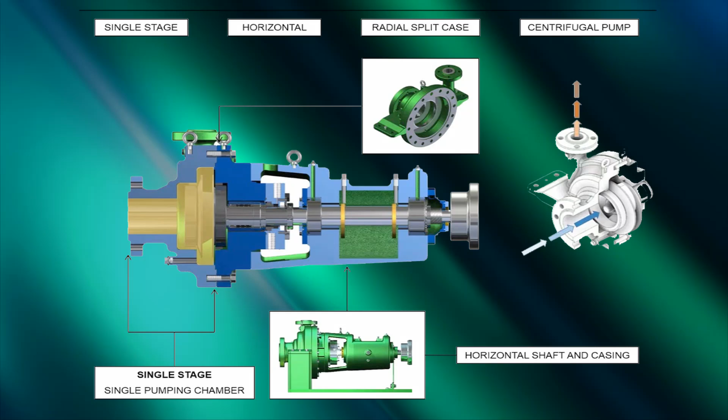This video will guide you through the disassembly, inspection and reassembly of a single stage, horizontal, radial split case centrifugal pump. The pump procedures are described in a series of videos, each including a step-by-step guide focused on a workshop performance activity.

The pump is made up from the following parts: a single stage, horizontal, radial split case centrifugal pump.

During the pump overhaul procedure, you will use a selection of tools to safely perform each task. Each section of the video will begin by describing the tools and their parts, and the video sequence will further explain the correct use of the tools.

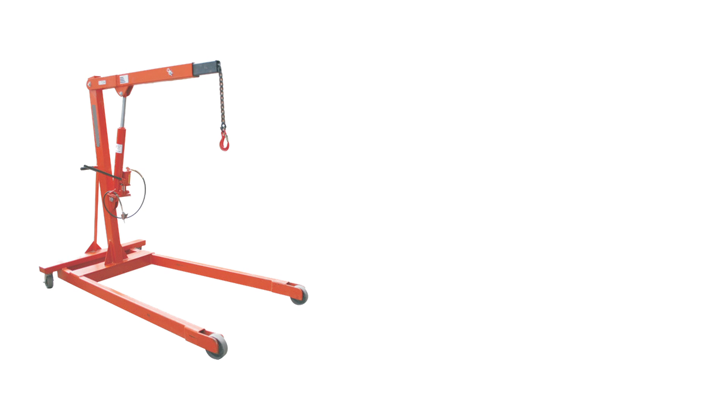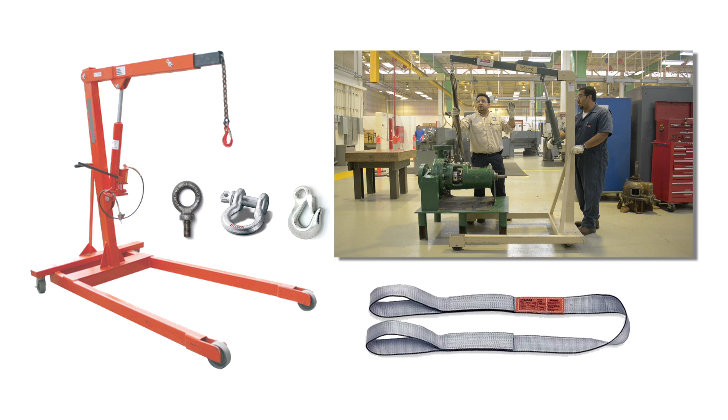At any time during the video, you can click on a toolbox icon to see the tools used for a specific task. You'll need to perform a series of lifting operations during the overhaul procedure using an approved mobile floor jib crane, web strops, eye bolts, shackles and hooks to perform the lifting and rigging tasks. Be aware that the pump is heavy and needs to be handled with care.

The disassembly procedure starts with the removal of the drive coupling. You will use bearing pullers to perform the task. The pullers are made up from the bridge beam, spindle, rods and beam bolts.

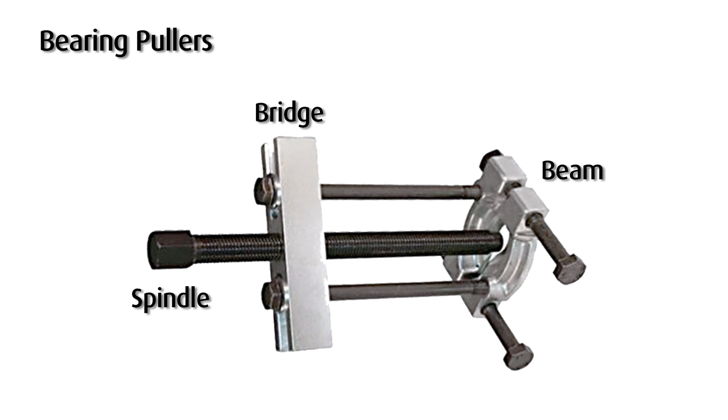This is the correct position for placing the bearing pullers on the drive shaft.

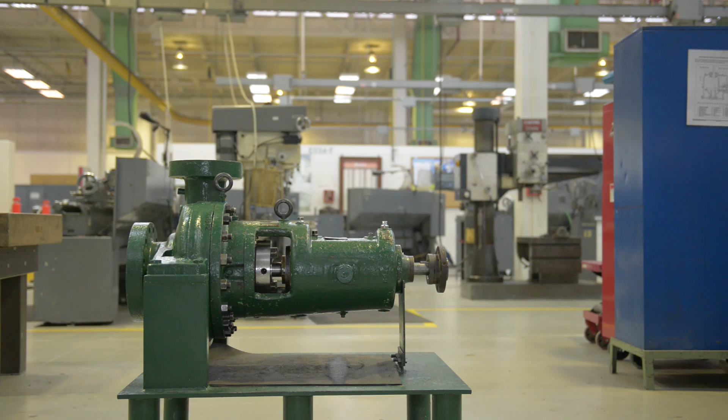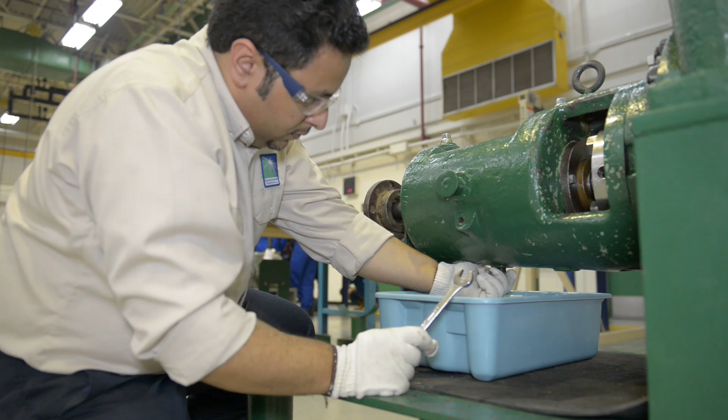Place an oil drip tray underneath the bearing bracket and remove the drain plug. Allow the oil to drain into the tray and dispose of the oil safely.

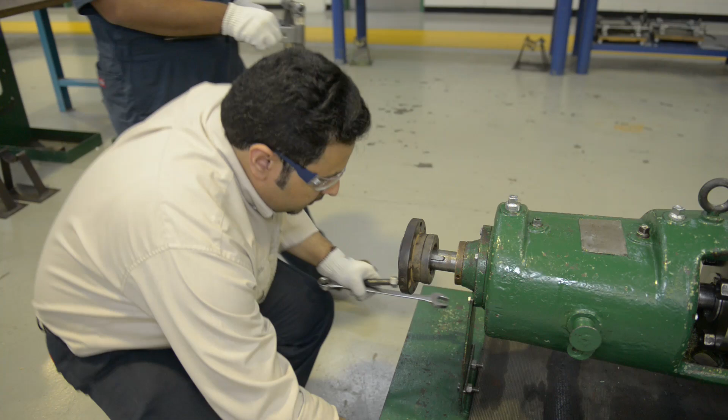Loosen the Allen screw holding the inner hub onto the drive shaft.

Position the bearing pullers so that the beam halves are positioned behind the inner gear hub. Tighten the beam bolts.

Use a ratchet or ring spanner to continue to tighten the spindle until the inner hub gear begins to slide and is completely removed from the shaft.

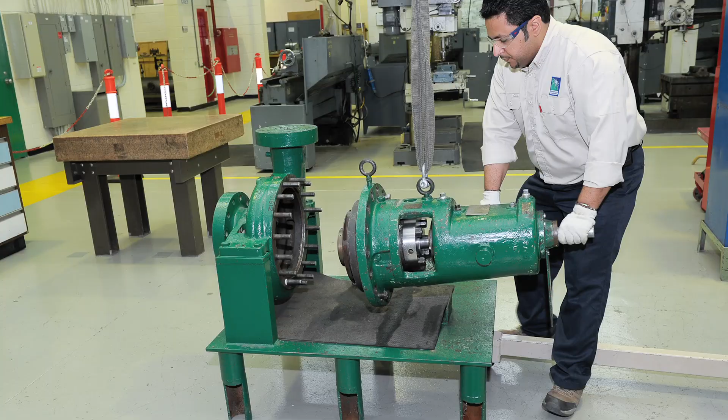The outer sleeve gear is now free to slide from the shaft. Use a brass punch to tap the coupling key free of the shaft.

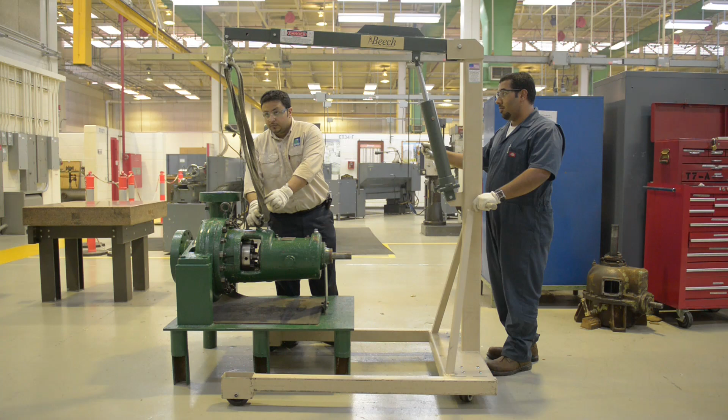The second part of the disassembly process is to remove the seal housing and bearing bracket from the volute casing. You will use a jib crane, hooks, shackles and web slings to safely remove these parts. This is the correct way to safely rig the pump for lifting using the correct equipment.

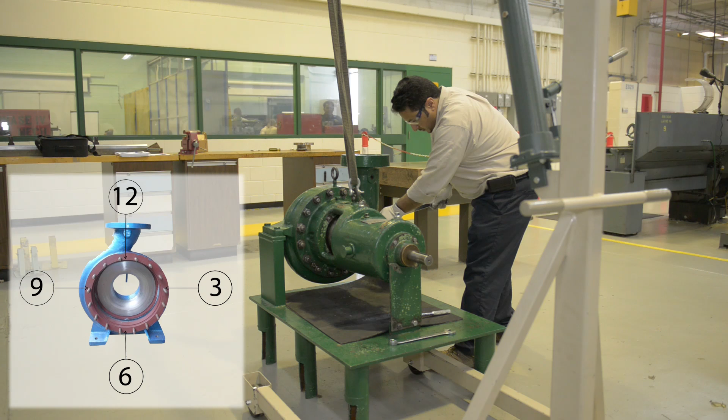Coordinate with a partner to position the mobile jib crane in a central position over the pump. Select the center of gravity, or COG, of the load. Rig the load with the hook and shackles and attach the web sling. Operate the hydraulic jib until the web sling is tensioned.

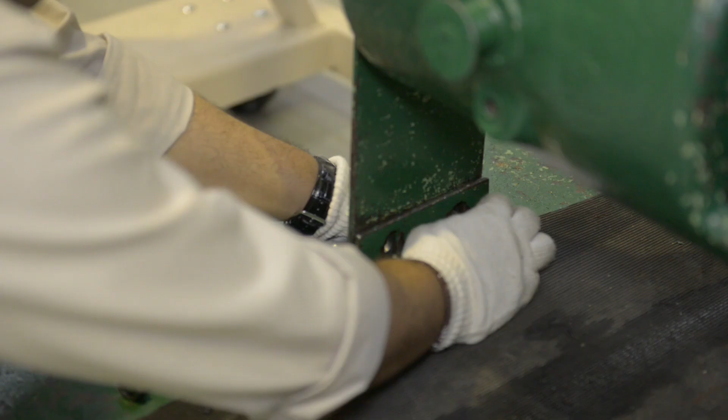The correct selection of tools to remove the pump from the volute casing is very important. Spanners must fit exactly over the head of the nut or bolt to avoid injury. In this section of the dismantling procedure, you will use a ring spanner, a combination spanner, a socket set and a drive ratchet.

You may need to separate the seal housing from the volute casing flange by forcing a wedge between the joint. It's a very important safety issue that you use a spark-resistant wedge and hammer to perform this operation.

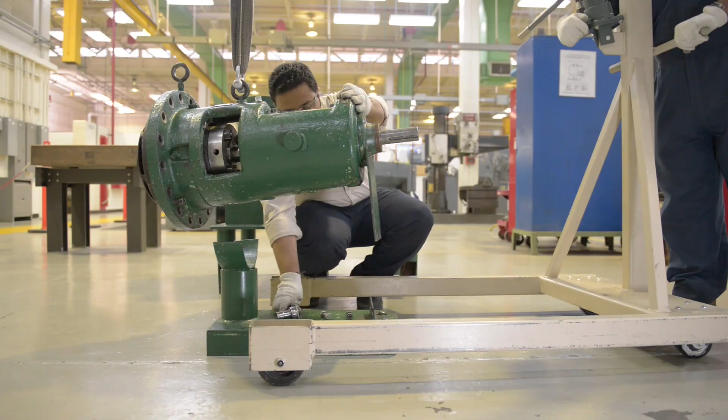Start by loosening each nut opposite each other on the seal housing flange. Loosen the nut in the 9 o'clock position first, then move around the pump to loosen the nut at the 3 o'clock position. This procedure ensures the pressure on the flange is released evenly.

Loosen the nut at the 12 o'clock position and then at the 6 o'clock position. Continue in this pattern until all the nuts are loosened.

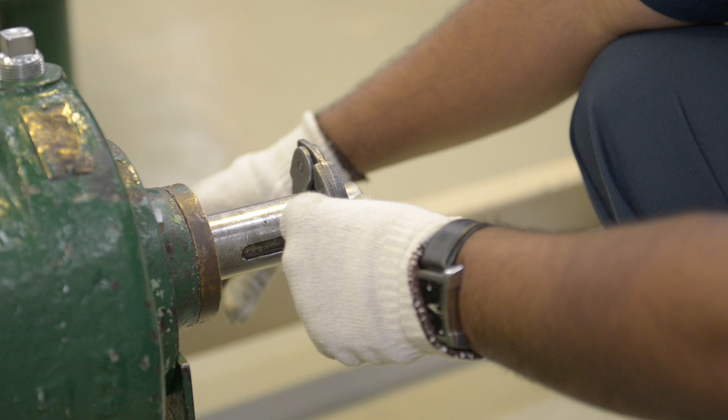Once all of the nuts on the seal housing flange are off, use the correct size socket, drive ratchet and combination spanner to loosen the nuts holding the bearing bracket support frame to the pump plinth. Withdraw the bolts and place them in a tray for storage.

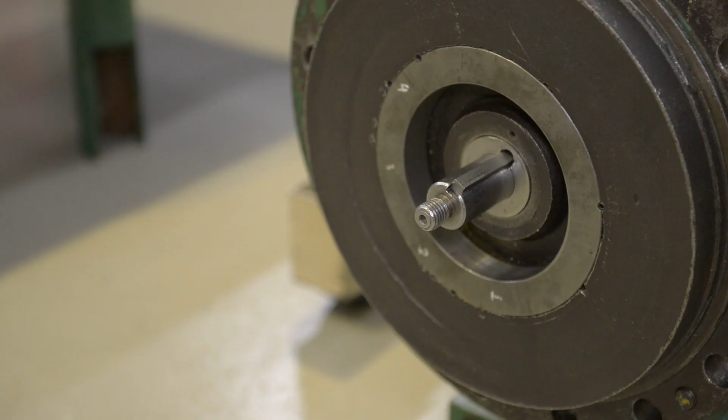The seal housing flange is a very tight fit onto the volute casing, and you'll need to jack away from the casing in order to remove it. 2 bolts are placed to push the seal housing away from its connection with the volute casing flange. The jacking bolts are positioned opposite each other, so an even pressure can be applied to ensure the seal flange does not jam in position.

Use the correct size ring spanner to tighten the jacking bolts. Work on opposite bolts a little at a time to slowly ease the flanges apart. Continue to jack the flanges apart until the pump is completely removed from the volute casing.

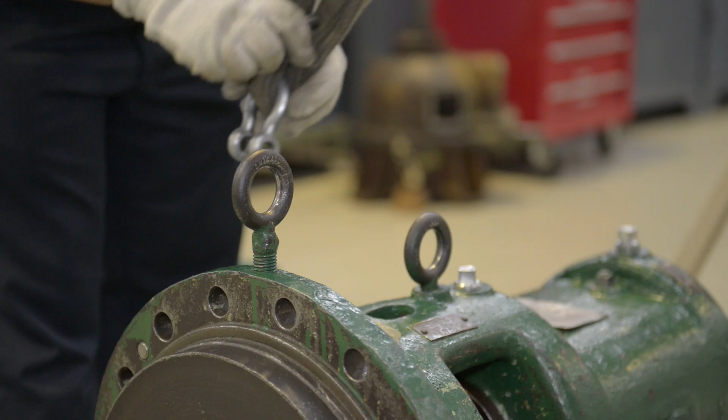The pump is safely supported by the mobile jib crane and can be withdrawn to a safe position.

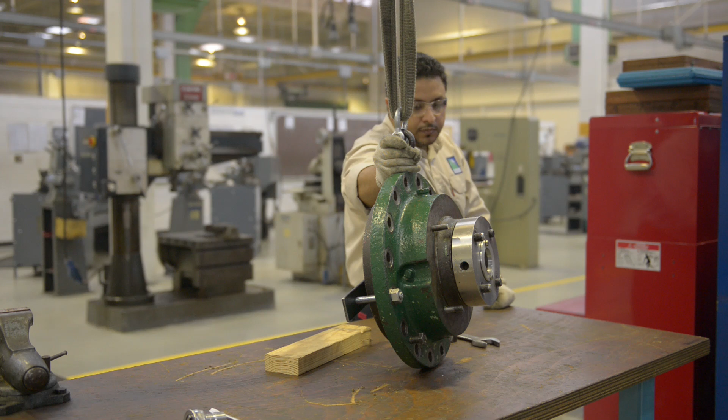Move the pump support jig to a safe position on the workshop floor with 360-degree access. Slowly lower the pump into position and place the bolts in the support. Use a drive ratchet, socket and combination spanner to tighten the bolts.

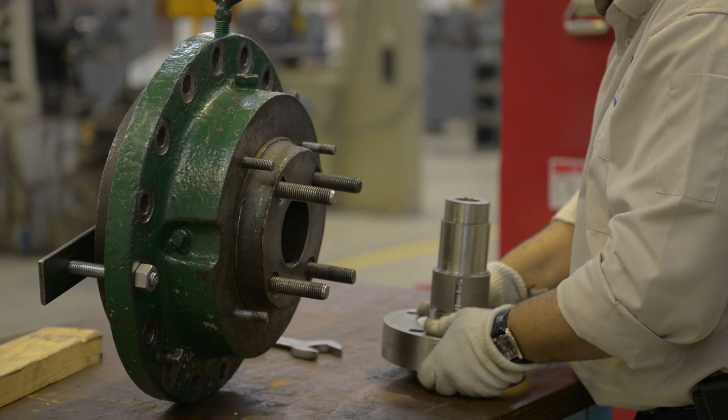The C-spanner fits into the shaft keyway and stops it rotating without causing damage to the surface of the shaft. Locate the hook of the C-spanner into the keyway of the shaft. Make sure you position the C-spanner on the surface of the shaft to resist the rotation when your assistant begins to slacken the impeller lock nut.

Loosen the impeller lock nut in a clockwise direction, as it has a left-hand thread designed this way so it will tighten as the impeller rotates in the opposite direction. Remove the impeller lock nut and place it safely in a parts tray. Withdraw the impeller from the shaft and place it safely on a workbench.

Use a brass punch to carefully dislodge the plain key from the shaft. The punch tool is made of a metal that is softer than the key, and it will not damage these parts.

In order to remove the seal housing from the bearing bracket, position the mobile jib crane over the jig support. Attach the shackle and web sling to the eye bolt on the seal flange and tension the web sling on the mobile jib crane.